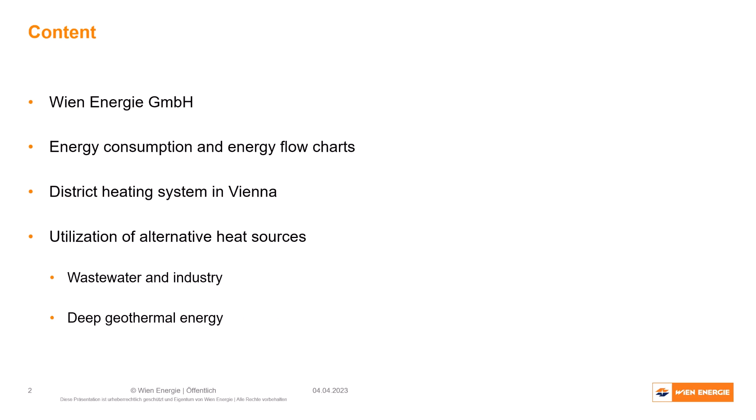In my presentation, I will give you a brief introduction. What is Wien Energie, what we are doing in the company, and then the energy consumption level in Austria and in Vienna. Based on that, we go to the district heating system. In the next part of the presentation, I will come up with some examples of how we can really decarbonize the generation part of the district heating system.

What is Wien Energie? Wien Energie is a local multi-utility company. We produce electricity, heat, and cooling, and also sell gas to our end consumers. The number of employees is in the range of 2,200 people. We work in different energy sectors. We have a district cooling system in Vienna. We also work in the mobility sector with the installation of electric charging stations across the city. In electricity production, we are focusing on solar power installation in Vienna and in the whole country.

Okay. What we are planning in the next few years is a huge investment in the heating sector, in the decentralized heating system and in the district heating system. We are focusing on photovoltaic implementation in Austria. Our target is a capacity of 600 megawatts until 2030. Cooling and the problems in summer are also an aspect of our strategies, and we want a higher production rate of cooling in Vienna. We already have a cooling network, and we want to expand it.

Going to the final energy consumption in Austria, the figure refers to the year 2019. Final energy consumption in Austria is in the range of 335 terawatt hours, subdivided into the electricity, heating and cooling, and mobility sectors. What we can recognize here is that the heating and cooling sector is the major part of end energy consumption in Austria, and this is the same in other European countries.

But if we look at the renewable energy share, it is really interesting that in Austria's electricity sector we have a high installed renewable capacity, and the renewable share is in the range of 75%. That is because of our hydro power plants, installed in the last decades. The renewable share in the heating and cooling sector is in the range of 34%, and the lowest is in the mobility sector.

The figure shows that if we want an energy transition, we first need the heating and cooling transition, then the mobility transition, and at the end the electricity transition. Generally, in the discussion among politicians and decision makers, and more or less in society, for example also in Austria, we are talking more about the electricity transition.

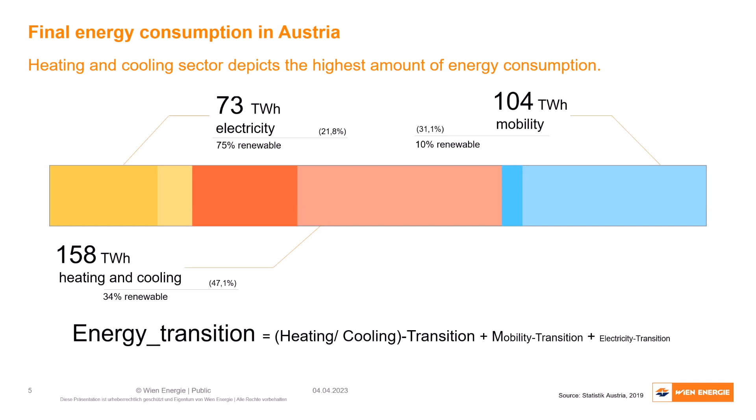This is not only the problem we see after the beginning of the war in Europe. We also had some problems at the beginning of the 2010s decade from the economic point of view, and that was the reason we said, okay, we have to go away from, or reduce, the share of natural gas in our production mixture.

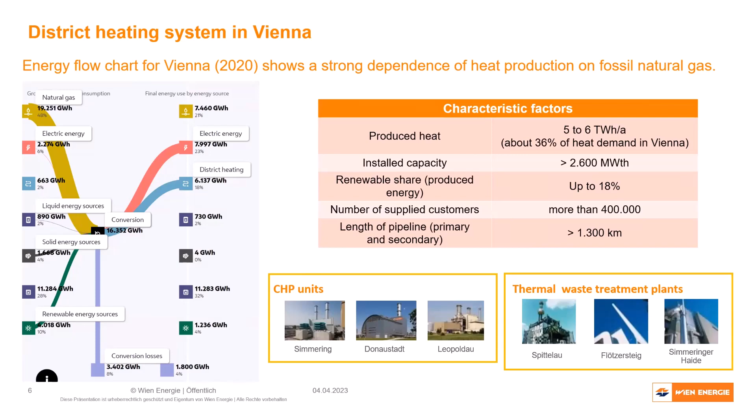Good. We have a district heating system which is mainly based on gas, and we want to change the system. And if you want to change the system, it is not only about diversification in the generation infrastructure. We also need digitalization. That means there is a need to get current information from the end consumer to the central station, from where we can also change the output of the power stations.

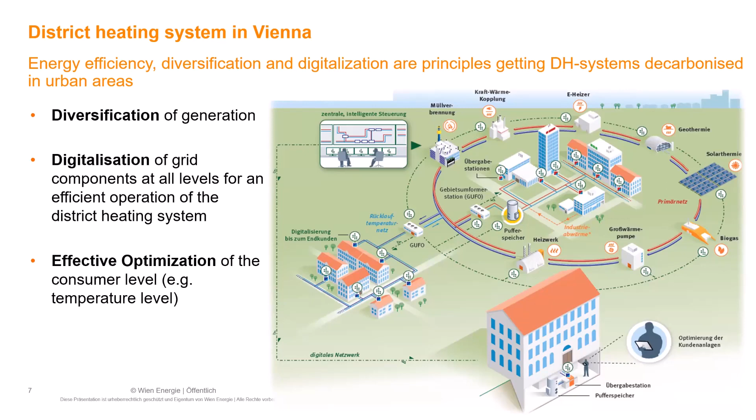And what we also need is energy efficiency. That means we have to optimize our end consumers regarding the usage of the heat level we have in our system. With this slide, I want to say, okay, we have to go to decarbonization. We want to reduce the gas factor in our district heating system, but that is not only done by changing the generation units. There is also a need for digitalization, and, of course, very important, energy efficiency. We need a lower temperature level in our system to get more renewable or alternative energy sources into the district heating system.

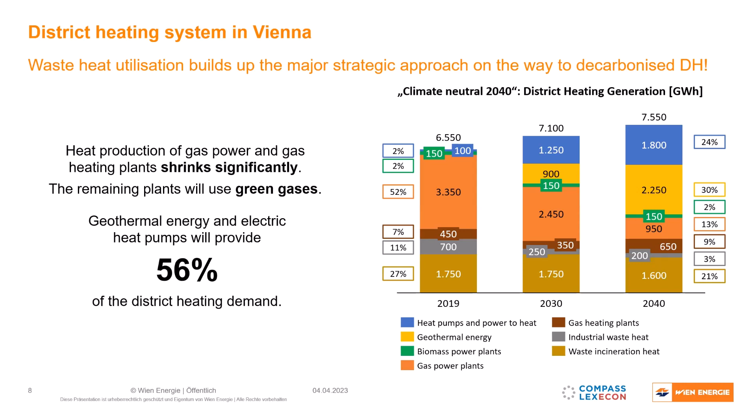And if I want to go to the future, I need to know, okay, how can I get there? The basis is to categorize my alternative sources and to know how much potential I have, and how I can integrate them in my system.

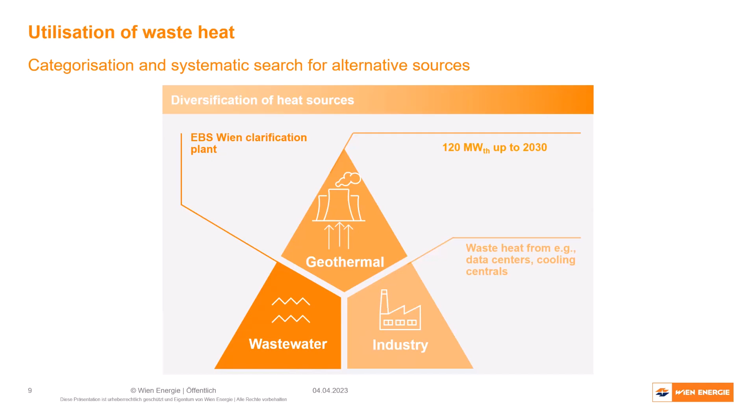What we have done is categorize our possibilities in three sectors. First is the usage of wastewater as a source, then using geothermal energy for heat production, and also using waste heat from industry. For example, we can use data centers or cooling centrals, take their waste heat and put it into the district heating system. Good. That is the basis of what we have done in the last years.

We have, for example, a heat pump using the waste heat from a data center to get the waste heat into the district heating system. We are planning in our waste incineration plant a large heat pump using the condensate as a heat source. We have also a cooling center called UNO City, where we use the waste heat from the cooling. We have one of our first large heat pumps, which is located in a power station.

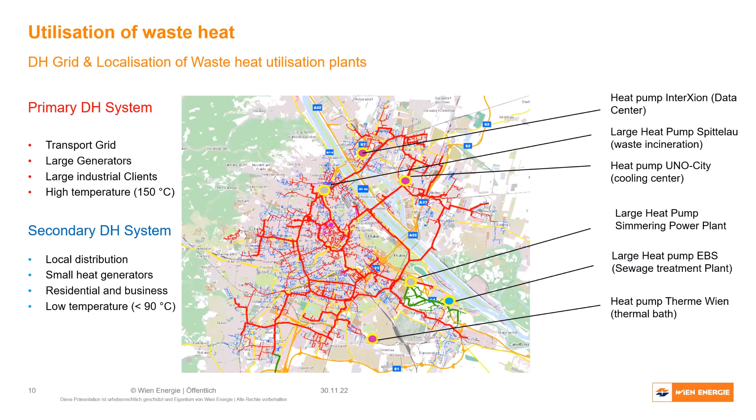I will come to more details on the project, and also we are currently in the realization of using the heat from the wastewater in the sewage treatment plant in Vienna. And that is an overview of our plans which have been realized in the last few years regarding utilization of waste heat. And I go now to some specific projects to show you what we have done in each of the projects.

For example, I choose here the large heat pump at Simmering Power Station. We have in the Simmering Power Station 2 CHP units with approximately 1 gigawatt installed thermal power. And the system is so that we are using a cooling water system to cool the CHPs, which are located in Simmering. And we installed a heat pump to use the waste heat in the cooling system for the district heating.

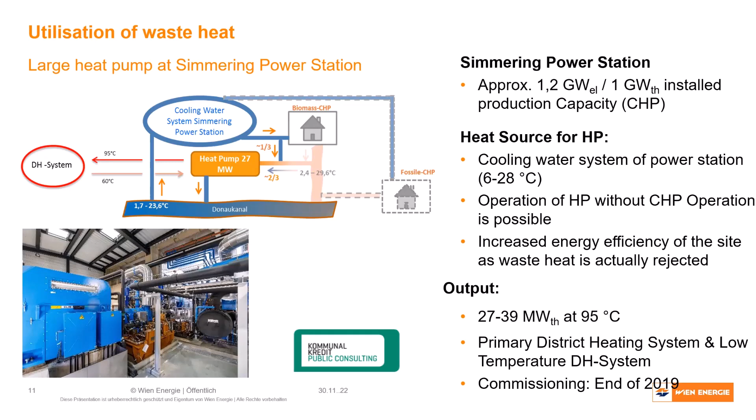That means we have a cooling system which has a temperature in the range of 6 to 28 degrees. We take the waste heat from the cooling system and put it in the district heating system with a temperature level of 95 degrees. That is a heat pump with an installed capacity of 27 megawatts, and the commissioning of the project was in the year 2019.

Another example is using a data center, because a data center provides waste heat and needs cooling energy 24/7. And what we do here is install a large heat pump with a capacity of 3 megawatts, using the waste heat, putting it into the district heating system, and we can also cover the energy for a hospital directly. And on the other side, we give the data center cooling energy, and that is a perfect example of a really efficient system. We can use the waste heat and produce heat and cooling at the same time, and that is one of our projects where we are using the waste heat from the data center.

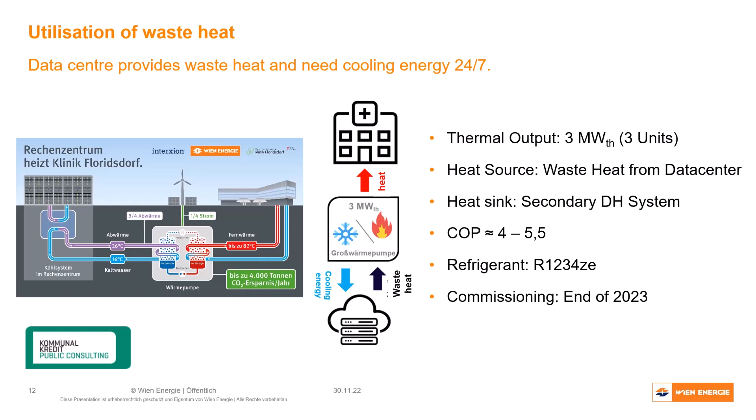Our flagship, our biggest project, is currently using the waste heat from sewage water. We have in Vienna one treatment plant, the so-called EBS-Kläranlage. The whole wastewater goes to the treatment plant, and after the cleaning, the cleaned wastewater goes to the Danube. And we are talking here about 4,000 to 6,000 liters per second of wastewater which goes to the Danube.

And here we use large heat pumps, using the electricity for the large heat pumps from a nearby hydro power station, to get the higher temperature, and put the heat into the district heating system, and the level of the inlet temperature is in the range of 90 degrees. We are currently in the realization phase, and we want to get the capacity of 55 megawatts until end of the year. And in the second stage, we will double the capacity up to 110 megawatts.

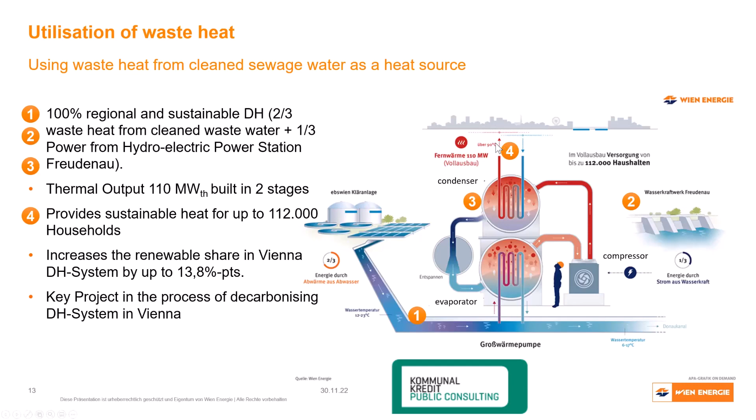As I showed you, there are 3 examples using waste heat from wastewater or from industry with different kinds of properties in the availability, in the capacity, and also in the temperature level. And that is one of our major strategy pathways to decarbonize the heat production in the district heating system.

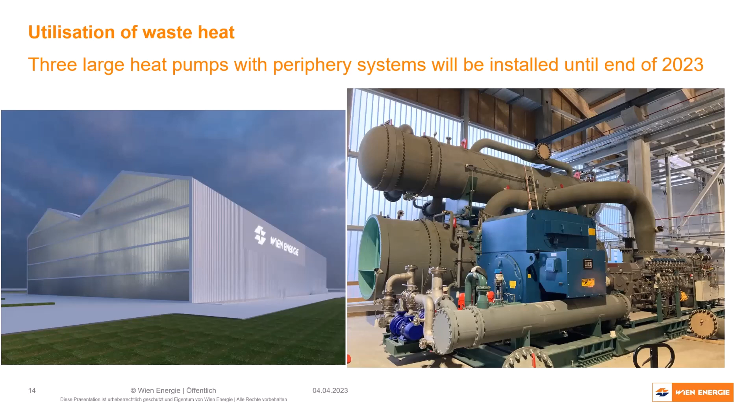And the other one is geothermal energy. When we are talking about geothermal energy, we are talking about the heat which is stored in the earth. The origin is from the earth's core, and in Central Europe, more or less, we say the temperature increases by 3 degrees per 100 meters depth. That means if you want to get a 100 degree temperature, you need to go down to a depth of 3,000 meters.

What are the best aspects of geothermal energy? This is locally available. This is a renewable energy, and in our opinion, it would be a price-stable technology which we can integrate into the district heating system. With geothermal energy, we can produce heat. Also, you can produce electricity. You can use it for cooling, and also for storage.

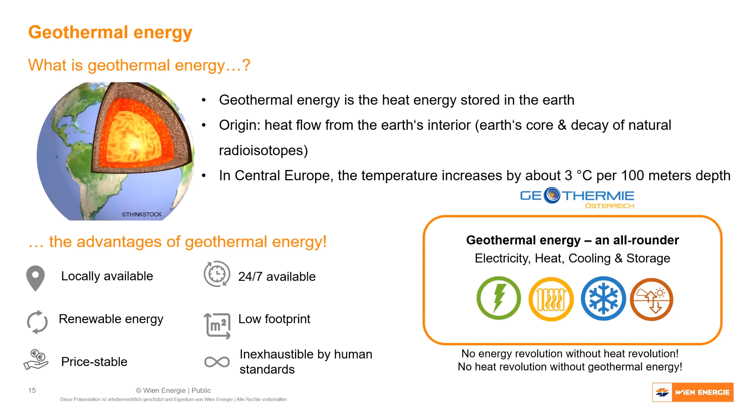And if I talk about geothermal energy, our focus is deep geothermal energy, and we are focusing on hydrothermal energy. That means we take the formation water, which is warm, to the surface. We use the heat from the formation water and put it into the district heating system. And the colder formation water goes down again into the depths, into the same reservoir.

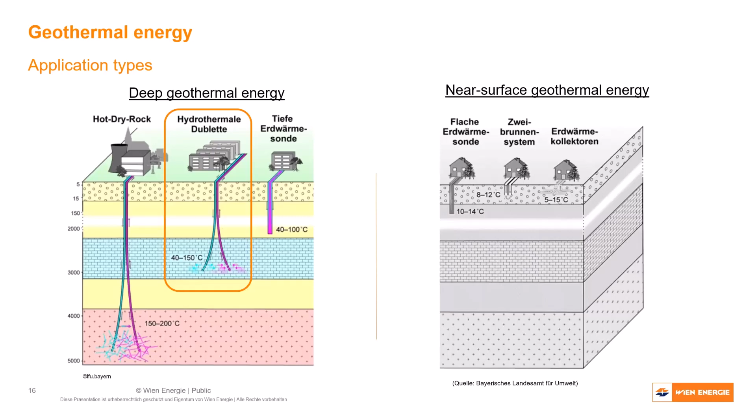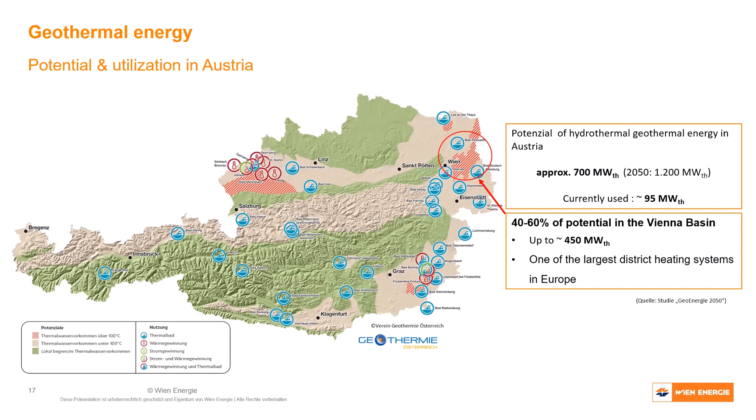That means we bring the potential to the district heating system, and we can get a decarbonization in our district heating system. And what you see here is that we are talking about a huge amount of potential regarding hydrothermal energy in the Vienna basin, up to 400-500 megawatt, which we can use for the district heating system.

Only again, what we need is specific comprehensive research for that. And in the geothermal area, what we always need is good databases. Therefore we set up a comprehensive research project from the beginning of 2016, with the main aim of getting into exploration and getting more data and information from the underground. We had 3 phases in our research program.

In phases 1 and 2, we made some acquisition. We made 3D seismic measurements. We went to the potential analysis. In phase 3, we closed up the research part with testing in an old borehole, to get more evidence regarding the existence of warm water in the underground in Vienna. And with the end of the research project, we are now in the implementation phase.

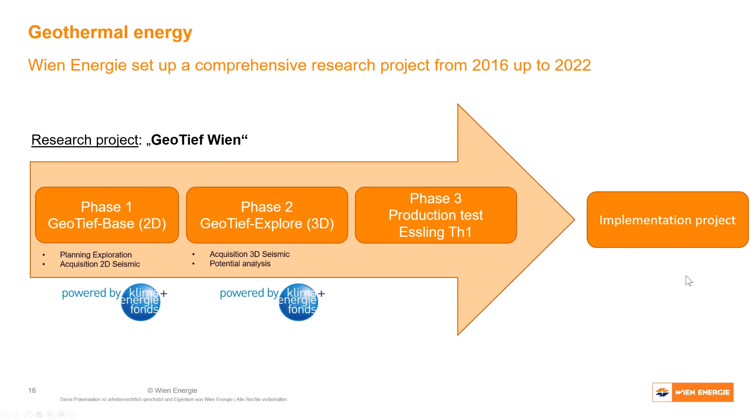To go more precisely to the milestones, we had a potential study in 2015, and after that we began our research project, so-called GeoTief Wien, and made some measurements: 2D seismic measurements, a small one, and big 3D seismic measurements in 2018 and 2019. In 2020, we got exact information about our target in the underground, and in 2021 we made a test to get more detailed information from the underground.

We made a test in our old borehole and we got hot water from the underground, and that was the point for us. Okay, in the underground of Vienna we have warm water, and we will go to the implementation phase and make specific plans regarding geothermal energy.

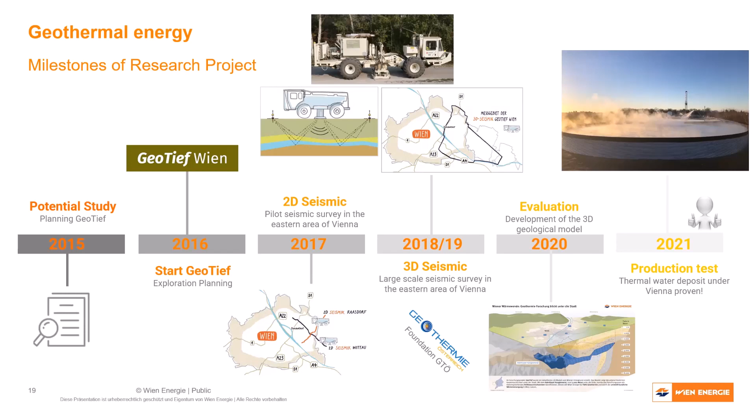Now we are planning the first geothermal plant in Vienna, with a capacity of 20 megawatts and an output temperature of 100 degrees. And we hope with it we can cover the heat supply of 20,000 households. That is the beginning of the way to integrate more geothermal energy into our district heating system.

Our midterm goal is to get 120 megawatt by 2030. In our opinion, we have done everything we had to do in the research part, and now we are going into implementation. And this project would be the first project in the area of geothermal energy.

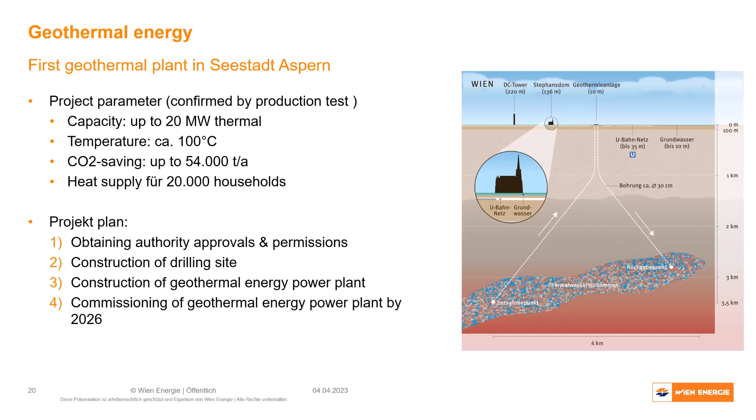Yeah, that is my last slide. As I told you, in my opinion, the energy transition only goes with the heating and cooling transition. It has to be at the first stage. The district heating system only has a future if we meet the challenges of decarbonization. And as I told you, decarbonization is not only changing the production infrastructure, but it takes time.

If you take a project from the concept to the commissioning, it takes 5 to 7 years. And our midterm strategy is of course to get 120 megawatt of heat from geothermal energy for the district heating system in Vienna.